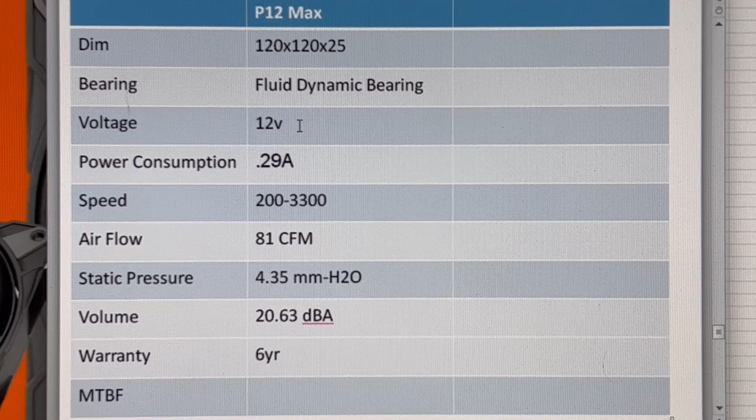Note that every manufacturer may measure decibels differently, so you can't always directly compare them against each other. And warranty is 6 years.

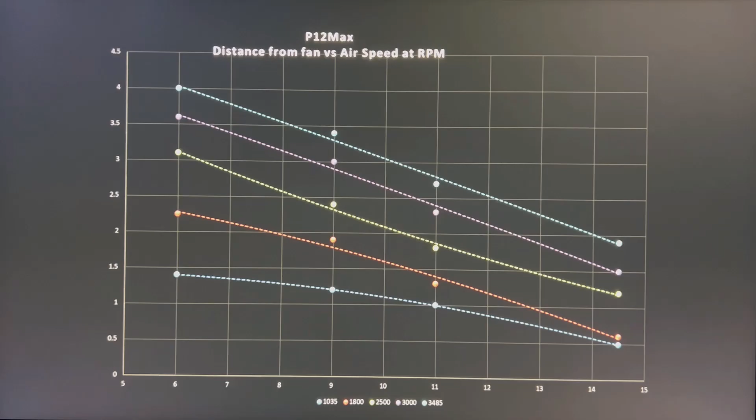Okay, first up in the testing graphs, we have my case simulation test. The case simulation test can be looked at in a couple different ways. The first way is by blowing in air. So the most perfect fan in the world would have a perfectly flat line.

So in my opinion, that means that the fan, as the air gets blown out the back, would have a perfectly cylinder shape in the exact size of the fan that it's simulating. So it'd just be a cylinder of air going directly at it, and it would have no losses whatsoever.

But we don't live in that kind of ideal world. Instead, we live in the real world, and there's air that the fan is pushing out of its way to get the air that it's sucking in to the back of the case. So that means we're going to see losses. But what kind of losses are we going to see?

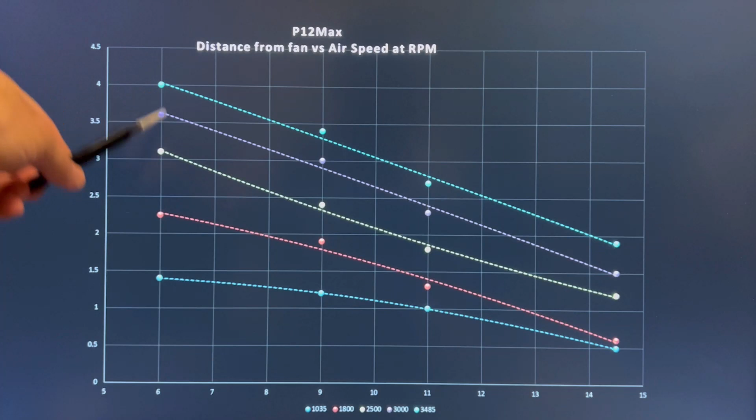Well, then the best fans are going to have as little loss as possible and as linear as possible. You don't want to see a fan that just drops off and goes to zero. That would indicate that the fan is shooting air off to the sides rather than pushing the air towards the back of the case. It's just something you want to avoid in a fan - a steep drop off in performance.

So what can we say about the testing from the other perspective? Well, this test also simulates different size cases. So I took it at 4 data points: 6 inches, 9 inches, 11 inches, and 14.5 inches. Each of those data points is representative of a different size case.

So 6 inches is representative of a small form factor that still requires a good amount of airflow. I don't know one specifically - I don't actually build in small form factor, but something that still requires a solid amount of airflow going through it, as opposed to ultra compact ones that try to squeeze everything into a very tight amount of space.

While 9 inches is representative of a very compact tower that still has front to back airflow. 11 inches is representative of a standard mid tower, something like the Meshify 2C, Fractal Design, or Corsair 550D. And 14.5 inches is representative of something like the Fractal Design Torrent, where it's just a big case.

And ideally, especially if you're using an air cooler - radiators don't matter as much - but if you're using an air cooler, you want the air speed at whatever size case you have to be as high as possible.

So let's say you have a compact case, the 9-inch size. You will be looking at which fans produce the most amount of airflow at that 9-inch mark. If you've got an 11-inch case, or a mid-tower case, so you're looking at that 11-inch mark, you want the highest amount of airspeed there.

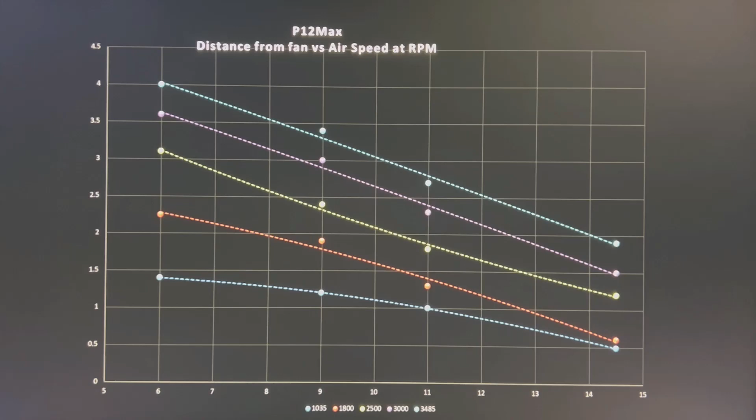And the reason for that is having a higher airspeed hitting the fan that is basically cooling off your CPU means that it doesn't have to work as hard to suck in the air. It just keeps the momentum of the air traveling through it, and also means that there isn't as much heat buildup around the cooler, so it allows it to operate more efficiently.

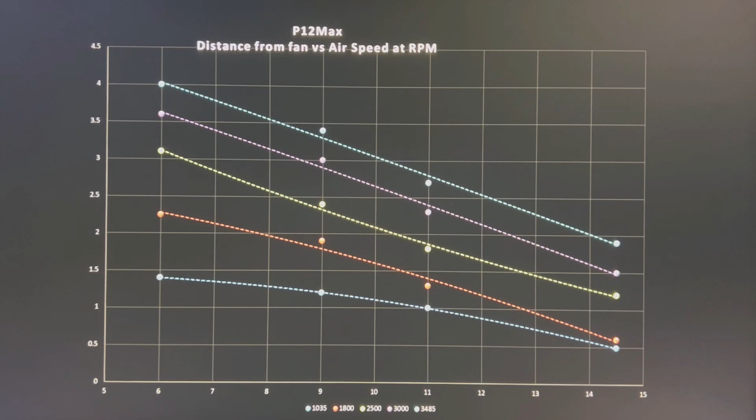None of this means anything unless we can compare it against something. So I've noise normalized distance from the fan versus airspeed.

My noise normalized value is based on 40 decibels by having the fan or the microphone base basically right up against the fan blades. I have a future testing methodology video that I'm working on, retesting every single fan using a new testing methodology that I'm hoping will reduce the amount of error from plus or minus 4 decibels to plus or minus 2 decibels, and reduce the amount of error in how close I have the microphone to the fans.

That's causing extra air turbulence of air coming into it, causing buffeting effects on it. I think I was getting some of that, and it was causing some fans to give me falsely high noise levels. But it's hard to say for certain until I finish testing every other fan and then organizing the data. So I hope you stay tuned for future content.

But let's talk about what we're looking at right here. This is noise normalized. And that noise normalized value for the control fan is based off of the A12x25 running through my old case, the Corsair 550D, running through an AIO. So that would be 2 fans running through the AIO.

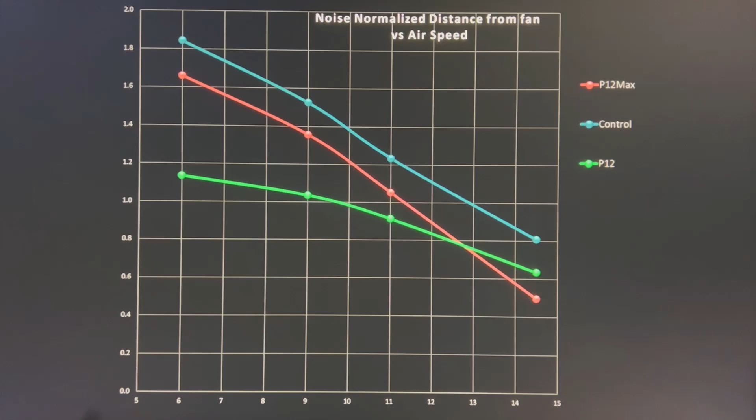So it's pretty interesting that the P12 Max is actually more efficient, better at moving air than the P12, except when you're looking at big cases. The P12 appears to outperform it by a little bit, but both of them are worse than my control fan. So again, you would use the data point that's applicable to your size case.

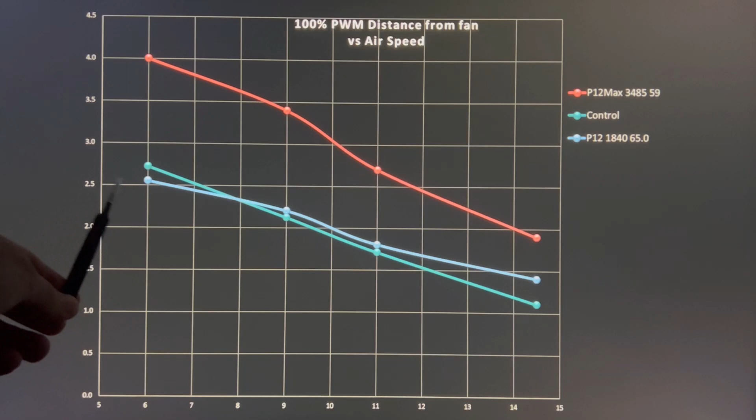Next, how do they do at 100% PWM fan signaling? Well, the P12 and my control fan are near identical. Do note the RPM and the noise level that they're running at in the legend on the side, while the P12 Max turned out to be quieter than the P12.

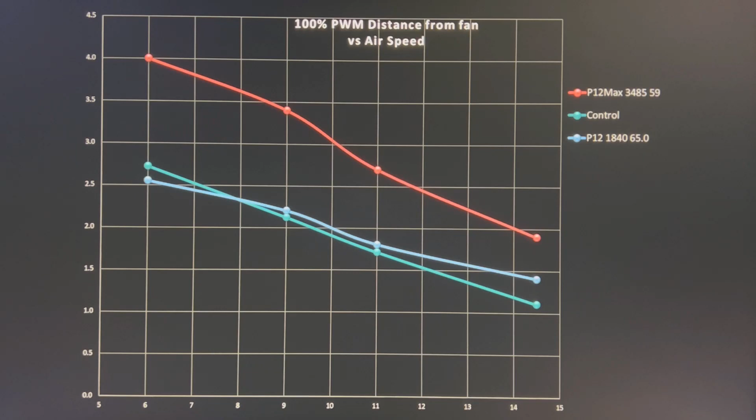I may have just gotten a lemon, but who knows, or maybe I got a golden sample of the P12 Max. But it was running at 3,485 RPM, so it's a lot higher RPM than the P12. It was making less noise, so I may have gotten a golden sample there, like I said. But it is vastly outperforming both my control and the P12 regular, but it's also spinning a whole lot faster than the control fan, which is based around a 2,100 RPM fan, so it's hard to directly compare them.

But let's say you want to compare it against every other fan I've tested. Well, this isn't every fan because it would be impossible to read the graph, but it shows a lot of different fans, specifically fans that I put into kind of categories. So up at the top you have the best fans, at the bottom you have the worst fans, and somewhere in the middle is somewhere in the middle.

And it's pretty clear that the P12 Max is a better fan, unless you're looking at a big case, where it tends to drop off a little bit too quickly, in my opinion. But it is better than several other fans. Like this blue line is representative of the P12 ARGB. The Max version is outperforming it for the same amount of noise in the current testing methodology. So if you're looking at those two, well, you might as well go with the Max.

Bumping things up to 100% PWM fan signaling, and the P12 Max is right at the top. Again, we have the legend over here where it has the fan name, the RPM, and the noise level it was running at during this test. So the P12 Max was spinning at 3,485 RPM and 59 decibels.

The fan that is right underneath it is the Silent Wings 4 Pro 140 millimeter fan, doing 61.5 decibels of noise. The closest 120 millimeter fan is right here, and this is the Silent Wings 4 Pro 120, spinning at 2,930 and producing 53.4 decibels.

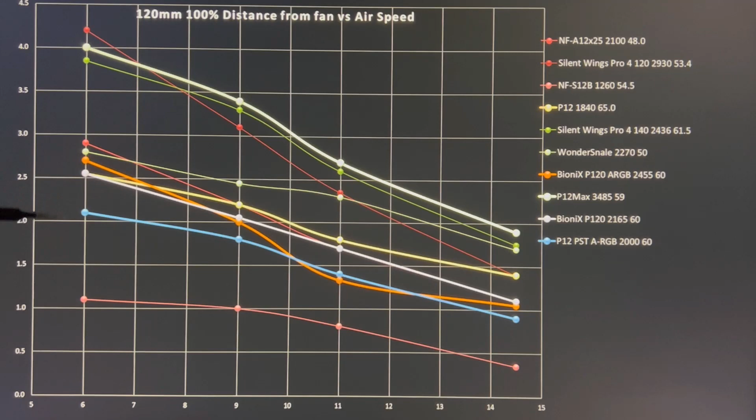And we have the other Arctic fans highlighted as well. Next up, we're still onto the case airflow test.

In this one, we're taking a look at the 9-inch mark of airspeed versus decibels. The 9-inch mark is where I tended to see the separation between the fans that were doing really well at the 6-inch mark and fans that didn't create good airflow. So fans that tend to shoot out off to the side still tend to do pretty well at the 6-inch mark, but they drop off quite a bit at the 9-inch mark before completely tanking at 11 inches.

So I ended up using the 9-inch mark as sort of this middle ground to do the noise versus airspeed comparison. In this graph, better fans are going to be sitting in the top left category, worse fans are going to be sitting in the bottom right. And we can see that the P12 Max is sort of in the middle, actually upper middle, so I'd say it's doing pretty darn good.

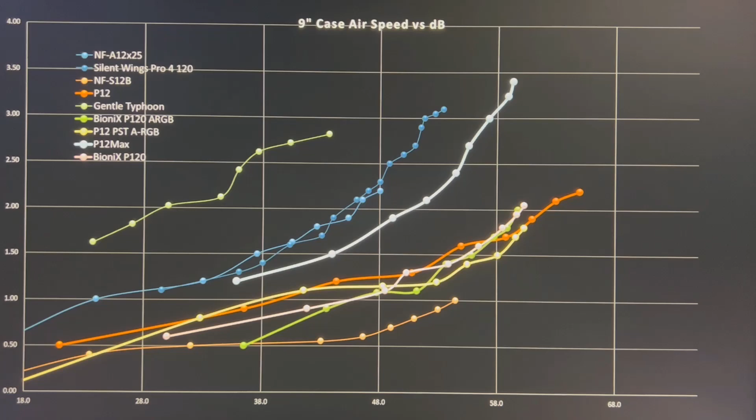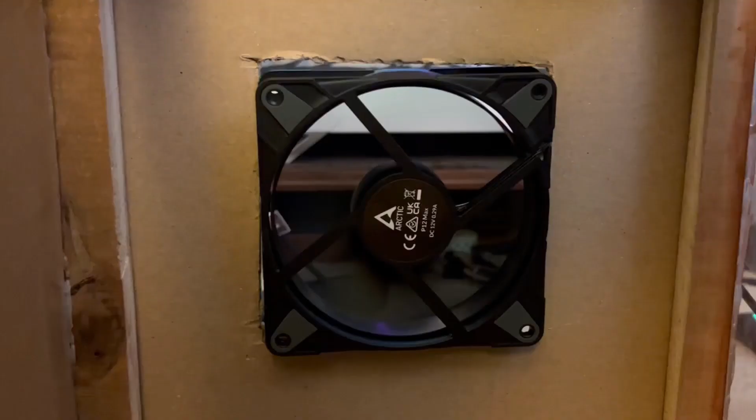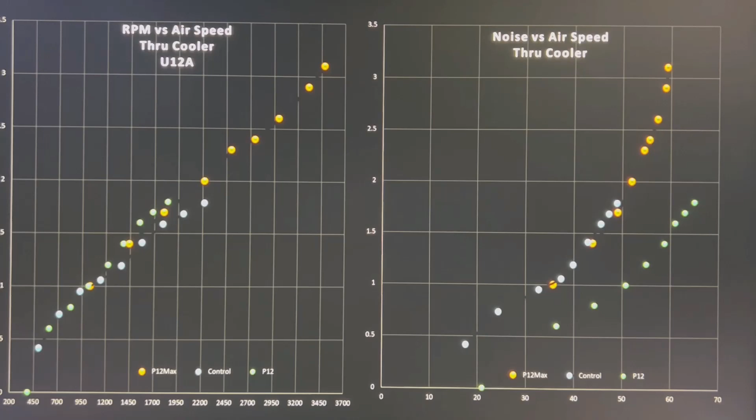Next up, we're seeing how the fan performs going through my CPU air cooler. My particular cooler is the Noctua U12A that features two Noctua A12X25s. However, in testing, I only use one fan on it to achieve all the performance data.

That would be meters per second on the vertical and RPM on the horizontal, or noise on the horizontal and airspeed on the vertical, so that everything is consistent and as apples to apples as we can get it. So the left graph here is RPM versus airspeed, and that is basically a blade efficiency test. It is how good is this particular design at pushing air through the heatsink.

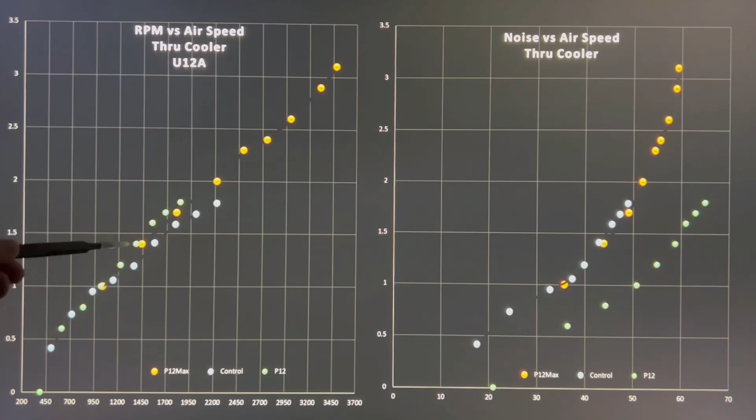We can pretty much see that the P12, the P12 Max, and my control fan all line up very closely. Actually, the P12 Max and P12 outperform it by a little bit as RPM increases. And interestingly, the P12 actually is slightly better than the Max until it reaches its maximum, and then it gets blown away by the P12 Max.

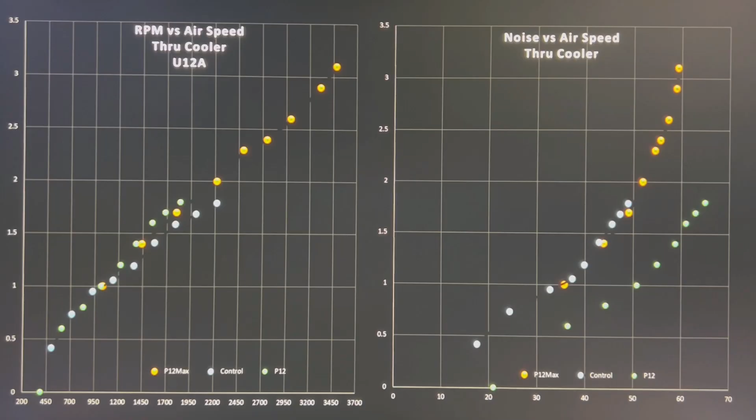When we jump to the right graph, we're taking a look at noise versus airspeed. This is how much air can this fan move for a given noise value, so it's a noise efficiency graph. Here we can pretty much clearly see that the P12 regular edition is not so great, while the P12 Max is following my control line spot on, and it's doing really well. It's looking really good. Now we're on to comparing these fans against one another.

I've already talked about the error in my measurement for my current microphone testing of plus or minus 4 decibels, and I'm hoping in future videos to reduce it to 2 through an update in the whole testing methodology. But there's also an error in measurements in my anemometer. I have an off-the-shelf anemometer, and its accuracy is plus or minus 0.1 meters per second.

So in another video, I actually went and did full testing on my Noctua U12A cooler to determine what airspeed was associated with what wattage. The only variable in that test was actually adjusting airspeed, because I just let my CPU run at whatever its maximum temperature it would achieve, and I have an Intel i7 11700K, so it was running at 91 degrees C.

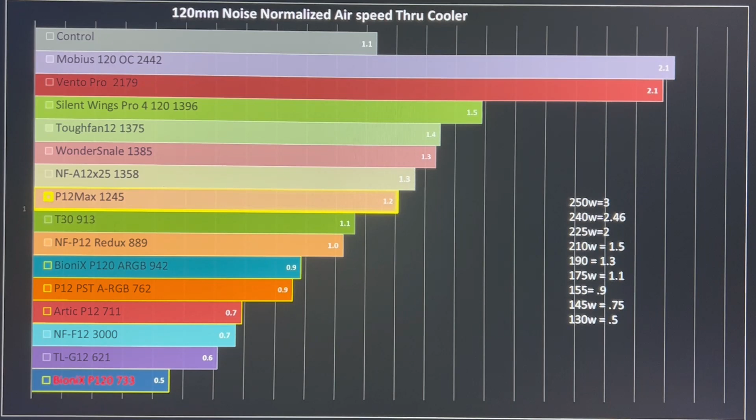Or you can take that and dial back the fan speed a little bit, so now it's running quieter because you think my particular noise level is too noisy, and you're going to get the same level of cooling for less noise. That's how you can use this data.

Moving things up to 100% PWM fan signaling, everything is more or less the same in terms of the wattages and how everything relates. My CPU's maximum wattage is 250 watts, so everything above that is just arbitrary.

And the P12 Max is a top contender. It is moving nearly as much air as the T30 and the NF-F12 3000 RPM fans, but it is doing it at very acceptable noise levels - just like 60 decibels, basically. It is equivalent to the T30 in terms of its noise value and only sacrifices 0.1 meters per second of airflow for a standard thickness fan. The T30 is 30 millimeters thick. And the NF-F12 is just significantly noisier at 69 decibels.

Ouch! The P12 Max completely blows the other Arctic fans out of the water in terms of its airspeed, and completely blows away the NF A12x25 in terms of its performance. However, it is doing it at the price of more noise. So this is where you need to decide what is important to you - having the absolute maximum performance or having acceptable noise levels.

I cannot make decisions for you, I can only present the data.

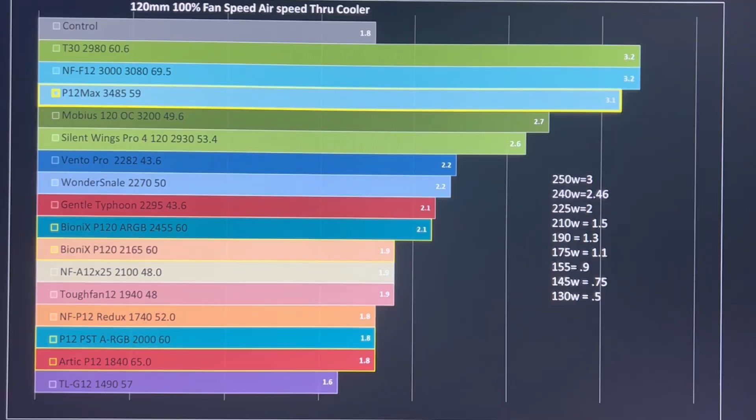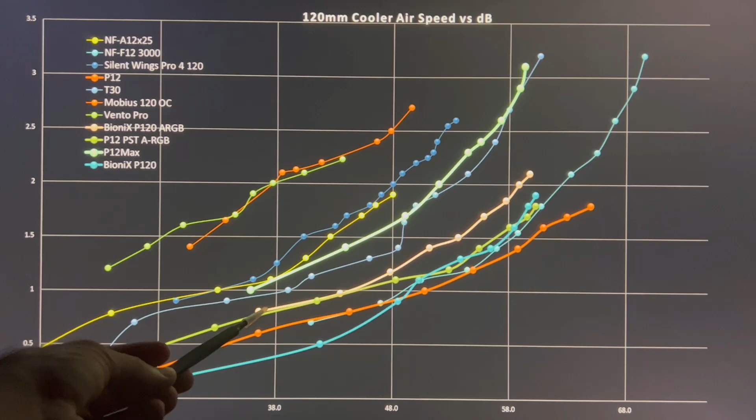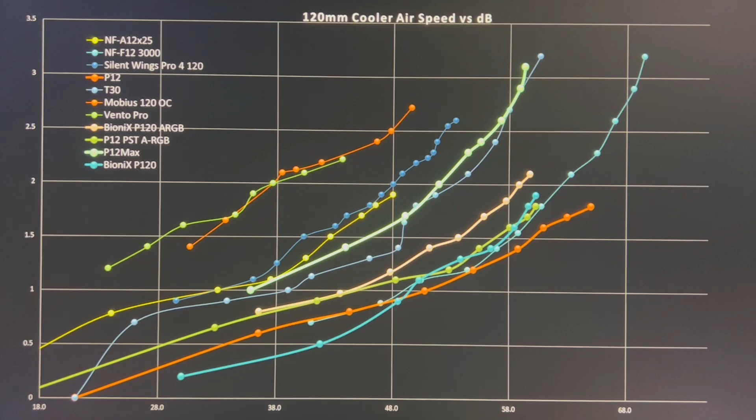Next, we're taking a look at airspeed through the cooler versus noise level. I've highlighted the P12 Max in green, and you can see it's in the upper fan category, but not the best fan category. The best fans right now, in my opinion, are the Gentle Typhoon and the Mobius OC. With the current testing methodology, the P12 Max performs very similarly to the Silent Wings Pro 4 120, following this trend line in the middle.

So I put that into the very good category, but not quite the extreme best, and it's outperforming what I consider the bad category. The next graphs are CFM. I don't particularly like this test because it's very scientific—you'd use it to generate PQ curves and other scientific information, but it's not really realistic for airflow applications. Essentially, CFM testing places the fan so the air blows down a tube, and you measure the airspeed at the end. A fan that shoots air off to the sides rather than straight down will still have its air pulled down the tube, hiding that fact. So two fans, one shooting air to the sides and one good at shooting it straight down, will look closer in performance than they actually are.

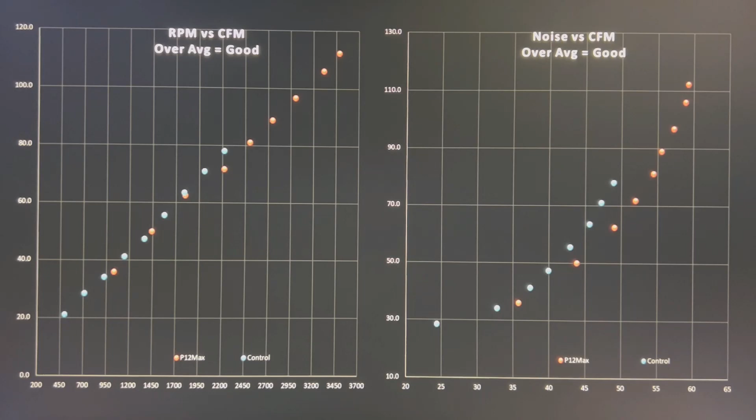But CFM testing is good at indicating one thing: it's similar to how air travels through a radiator, heatsink, or AIO. Because those components naturally straighten the air as it flows through them, similar to how the air travels down the tube in CFM testing.

So how does it rank? How does it look? It looks very similar to how it did through the heatsink in my air cooler test. We do see a little bit of difference in the noise versus CFM data, where the P12 Max looks a little bit worse than it did in the heatsink test.

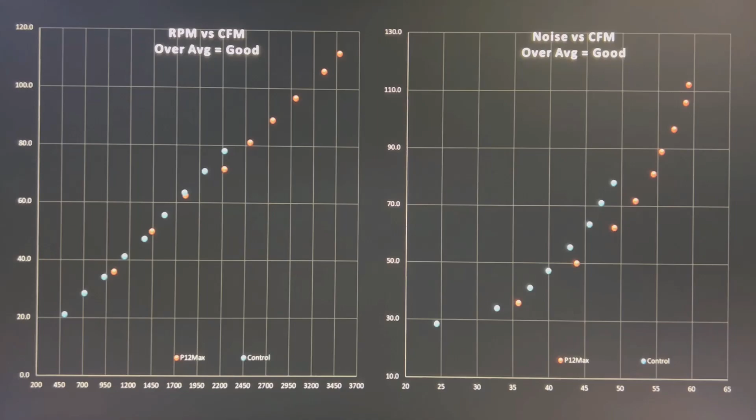Comparing against the majority of fans I've tested—I had an error in my presentation, so I had to go back into my Excel to pull it up, I do apologize for that. I've highlighted the P12 Max, and I'm actually having errors in Excel where I can't edit my graph. So it's going to look difficult to read, but here's the P12 Max, and it's functionally in the upper middle in noise normalized testing.

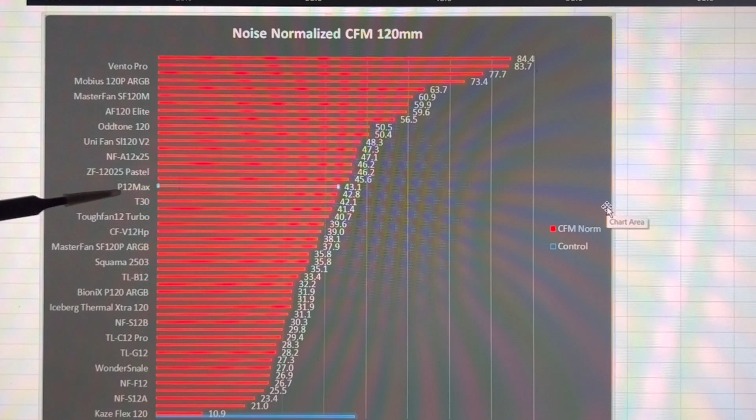It's actually doing pretty well overall, and you can see the Vento Pro is up there, which is the same as the Gentle Typhoon, the Mobius ARGB, and not everything is lined up. I'm sorry about that—there's just too much data on these graphs, and it's only highlighting what it wants. Now I'm highlighting the Vento Pro, now the Mobius OC, and this one is the AF120 Elite.

the P12 Max is a very good performer. This is actually the graph I ended up having problems with because it doesn't list all the data I want on it. Luckily, this next graph does, so I can continue with my regularly scheduled program.

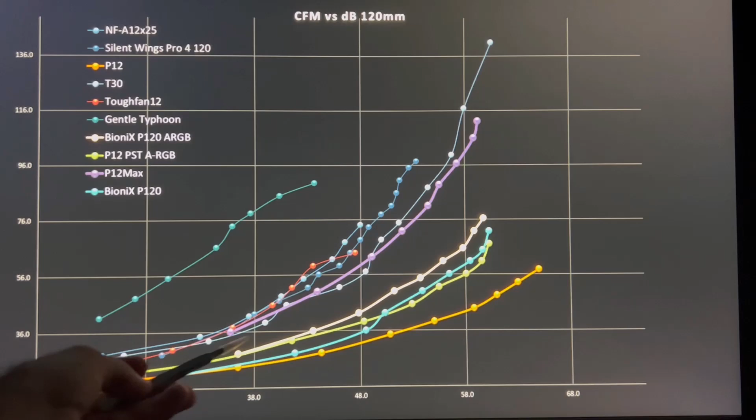So in purple, we have the P12 Max, and it's following this line right here, doing remarkably well overall, I'd say, versus the other Arctic fans grouped down at the bottom. So the P12 Max is once again proving to perform quite well.

Let's jump to our open box experience and examine this fan itself.

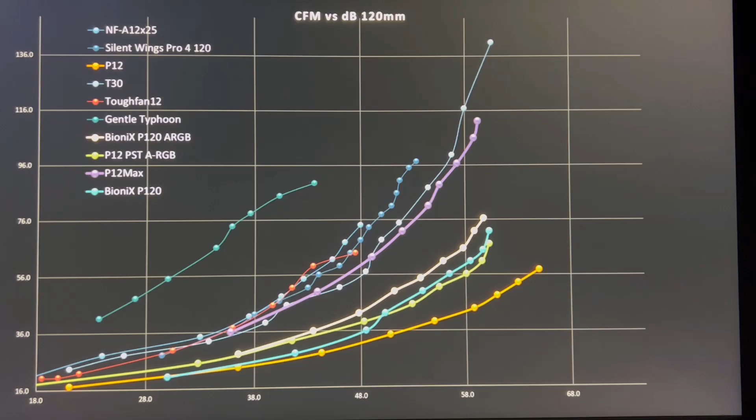So a little bit of a talking conclusion. What do I think of the Arctic P12 Max? I think it's an excellent choice, a great all-rounder if you're specifically looking at 120 millimeter size fans. That being said, there are better choices for case fans going up to 140 millimeter fans, which tend to do better in case airflow applications. But if you want to fill out 3 fan slots on the front of your case, this would certainly be a great choice, whether it's for your radiator, AIO, or custom loop - it's still a very excellent choice. It's becoming a very good all-rounder for a budget option, but if you're looking for noise performance, I'm finding it to be a little on the noisy side.